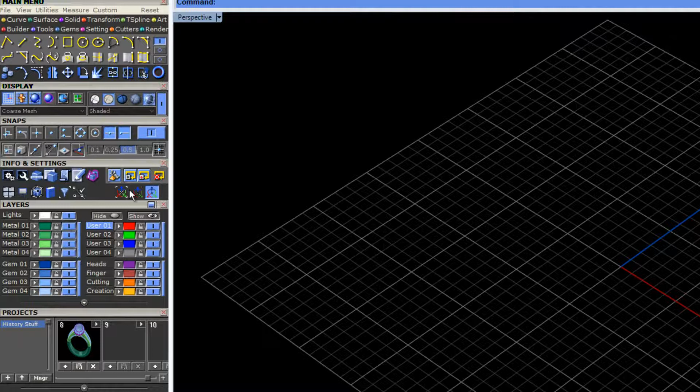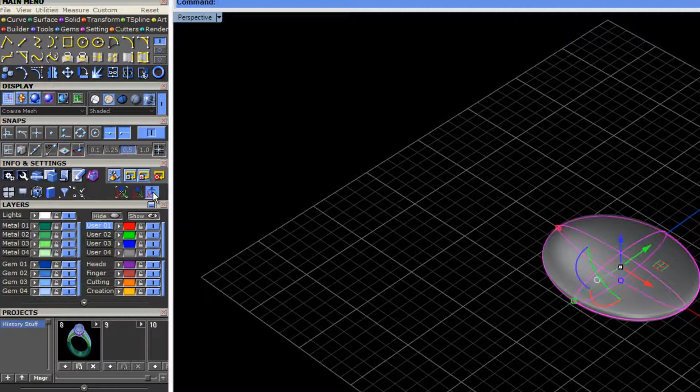So the first thing that you'll see here on the bottom layer is that we have three icons. And these are three icons for the Rhino Gumball. What is a gumball? Besides a delicious treat, well, a gumball is what Rhino refers to their interactive manipulation system here. You can see once I turn my gumball on by clicking on our icon, when I select an object, I am given a set of viewport control handles.

The way the gumball works is it puts all viewport control handles for move, scale, and rotate into one handy manipulator. So you'll see there are movement handles, which I can click and drag on. If anyone has used our MSR controls or the T-spline HUD manipulators, you'll be very familiar with what is happening here with the Rhino Gumball. Right, so you can see, it allows for movement.

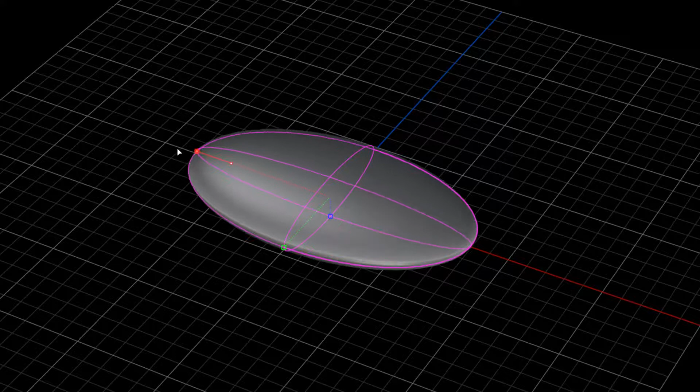We also have individual little spots right here for scale. As I click and drag on these, this would be a 1D scale. Okay, there'll be one running in the other direction, and then one vertically for scaling within the Z.

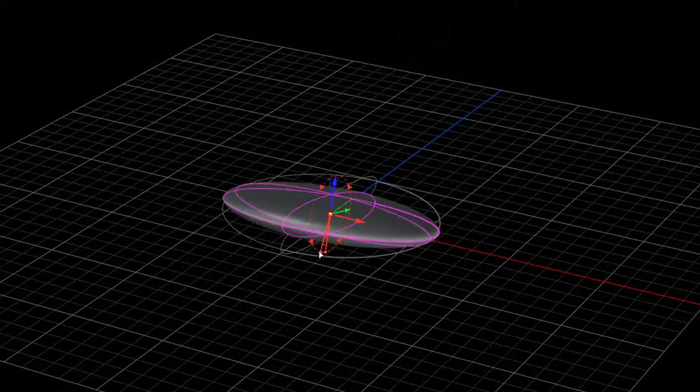Now, also, we have rotation handles, which you will see as these three little arcs right here on our gumball. So when I click and drag on these, you will see that it is rotating my object. Right? Same with this direction. And then we also have one for the other angle of rotation.

Now some of the other things that you will see here on your HUD. All of these rotation, movement, and scale manipulators are color coded. For example, you'll notice if I'm trying to move something in the Y direction, it shows up as a bright green, 1D scale in the Y direction is bright green, as well as rotation is bright green, all rotating or moving within our Y axis.

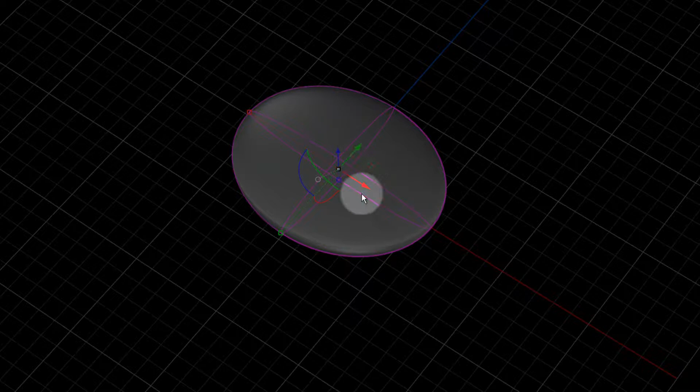Why I bring that up is you'll also notice here as I rotate my viewport around, you'll see this little box right here. And half of that box is bright green, the other half is red. What this little button is, if I click and drag on it, this is a 2D move. Again, if you've used the T-splines HUD, you notice they always have a little flat disc that you can use for a 2D move. So Rhino, with their gumball, has color coded it so you know exactly which two planes you are moving this in.

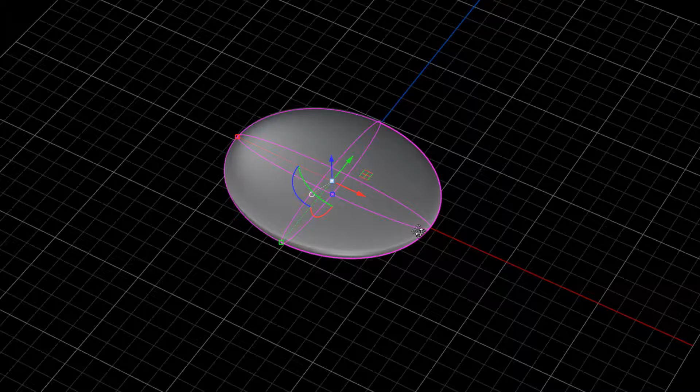So if I rotate around here, you'll see now one shows up that's blue and green. And if I keep rotating around, you'll see one that's blue and red. All right, Rhino 5 only displays the one depending on how you move it. Every now and then, if you move it just right, you can have two show up. But most of the time, you'll see just one of these 2D movement handles.

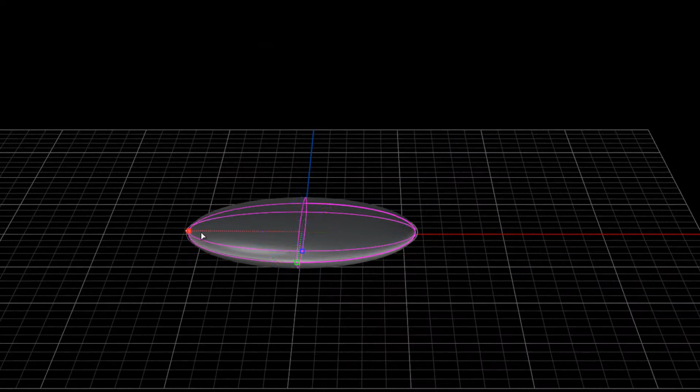All right, there are also some important keyboard shortcuts to know as we're using the Rhino 5 gumball. The first one is we showed you how I can scale with that particular handle. Okay, so that's just a 1D scale. If I click on this and hold down Shift, this will allow me to do a full 3D scale.

So you can see there it's only a 1D scale. If I click on this and hold down Shift, now it's a 3D scale. And if we're doing a 3D scale, it does not matter which one of these handles we select. Right.

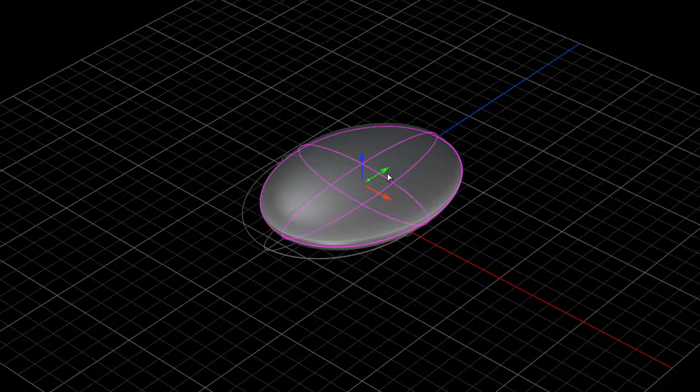One of the other things that has changed with Rhino 5 is that when we are moving an object, previously in Matrix and Rhino, if we held down the Alt key, we would make a copy of the object. However, in Rhino 5, they have changed this up ever so slightly. So with the new version of Matrix, instead of holding down Alt, you simply tap the Alt key once, and once you hit Alt, you'll notice there's that plus sign right there.

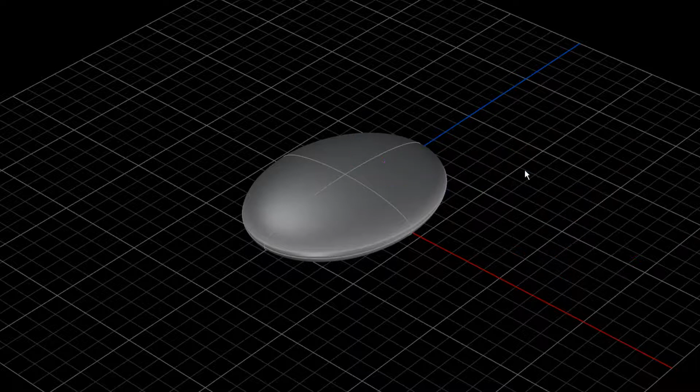Okay, so a simple tap of the Alt key versus a full holding down the Alt key is how you get your copied object. All right, so that is a slight difference in the new version of Matrix and Rhino than you will be used to. So that is an overall look at our gumball.

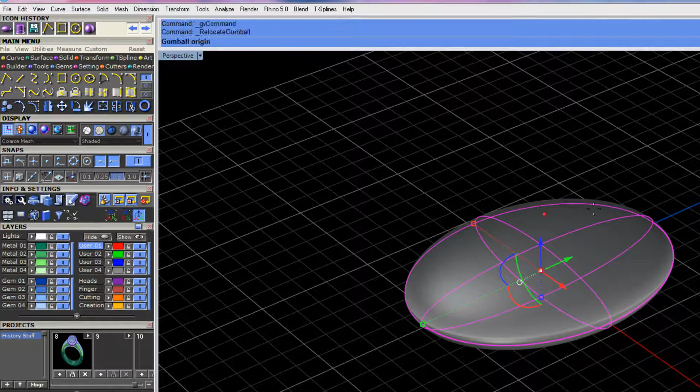Okay, as we continue on here into our info and settings, we have two additional icons. So the next icon here within our info and settings, they also have to do with the gumball. This one right here, if I click on it, will allow me to relocate the gumball. So it's going to ask for the new origin point. So I can snap right to an end.

And then in my command line here, it's going to ask me for the X direction. So I can hold down Shift. And then I can hold down Shift again to give it its Y orientation. So now I've set up my gumball to be right there on the end. Why would that particularly matter? Well, if I use scale now from this end, you can see this would scale differently because my point is right here in the center.

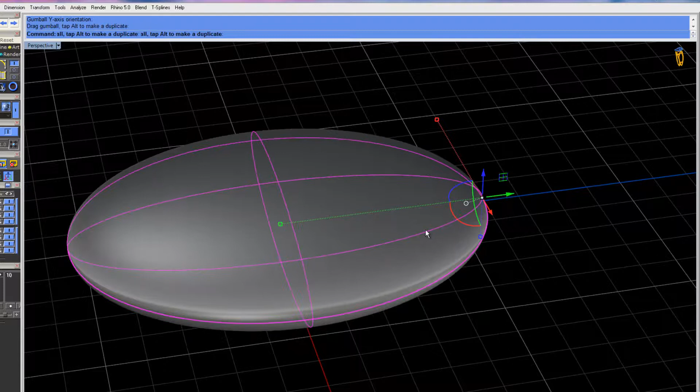All right. As we go back to reset this, there is a little icon right here in the center of our gumball. If I click on that, we will have a reset gumball button as well, and that'll take it back to its default position. All right.

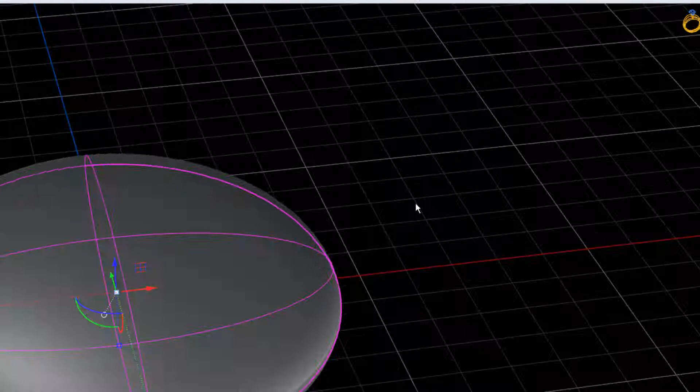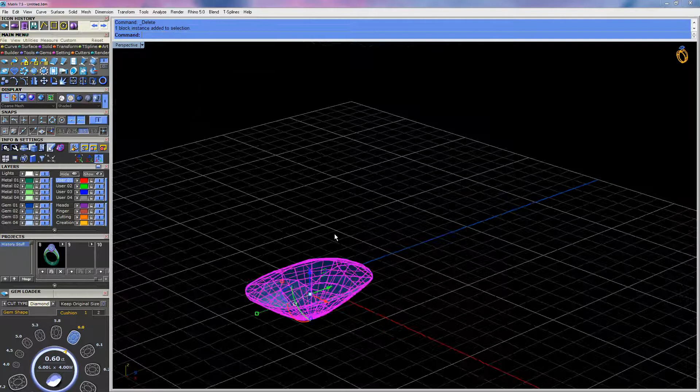A couple more notes about the overall use of the gumball. I've been working with a solid object right here. However, we can use this with curves, blocks, anything within the program can be used by the gumball. So you can see now if I select a block instance, for example, I have the gumball already on that as soon as I select my object.

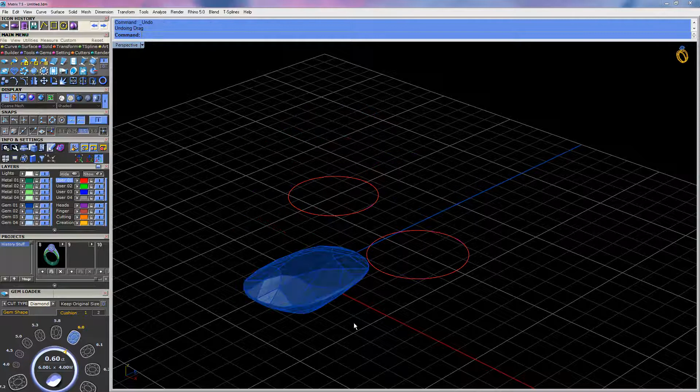In addition, I can select multiples of either the same object or different objects. Okay, if I select all of these together, the gumball will move all objects together as well. So that's a quick look at the gumball feature of Matrix 7.5.

Continuing on here with our info and settings, you'll notice another row of all new icons. So if I click on this icon right here, what this will do down at the bottom is it gives you a tabbed view of your viewports. So you could quickly cycle through the front, side view, looking down views by clicking on the tabs. Right? This makes it a little bit quicker as opposed to double clicking on a viewport to come out of the full size, double clicking to go back in. So this tab view allows you to quickly and easily move throughout them.

You also notice there's a plus sign that you can click on where you can adjust certain properties of your viewports. You can create a new floating viewport, for example, by simply clicking on this button, and you'll get a copy of the existing viewport that you're working on. Okay, there'll be a little X out there that you can click on to get rid of that.

So one of the other new viewport features within Matrix 7.5 is that if I click and drag on the perspective viewport, for example, and this is going to be hard to demonstrate on one single screen, but if I were to drag this off screen, or you can see I'm placing my cursor over my menus, as soon as I do that, it creates a copy of my existing perspective viewport. So I can move this over to my second monitor, for example, if I'm using a 2-monitor setup. All right, so we can X out of that.

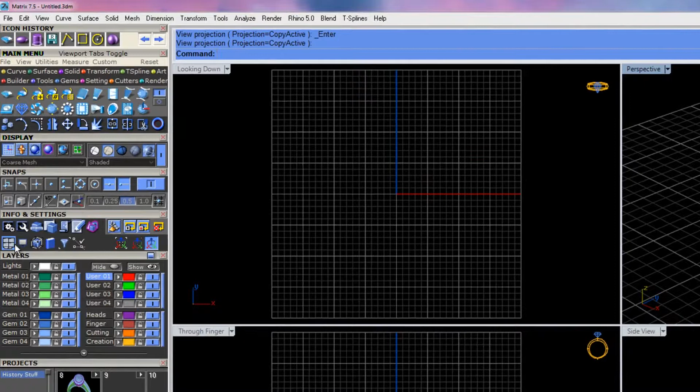All right, moving on through our info and settings tab. If I go back to the viewport tabs, I can click on that and that will toggle that option off. All right, next is our display menu. So if I bring an object out to display here, when I click on the display menu, we get this floating viewport, and this viewport can be docked along the side by moving your cursor. It can be docked or just left floating.

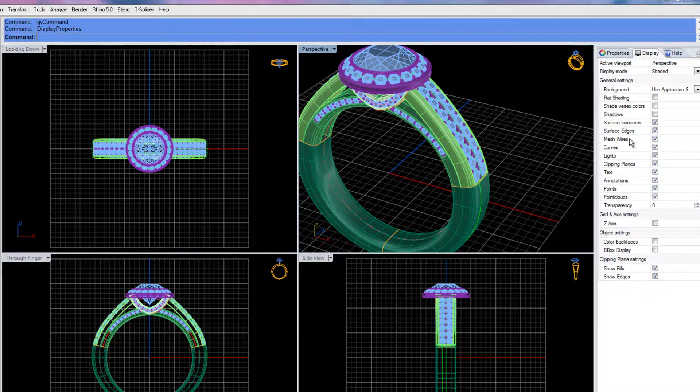So the display menu opens up a quick and editable properties tab for the display mode that I'm using. Currently I'm using the basic shaded mode, so you'll see that listed right here as well. I can go through here and choose what is shown or not shown in the particular shade mode that I'm working on, right?

For example, I could uncheck curves. I wouldn't see any of the curves out there on my ring right now. Also surface ISO curves, surface edges, and as I go through and do something like that, it starts to look more like a plastic shade mode. So you can quickly and easily do this with any existing shade mode that you are working on.

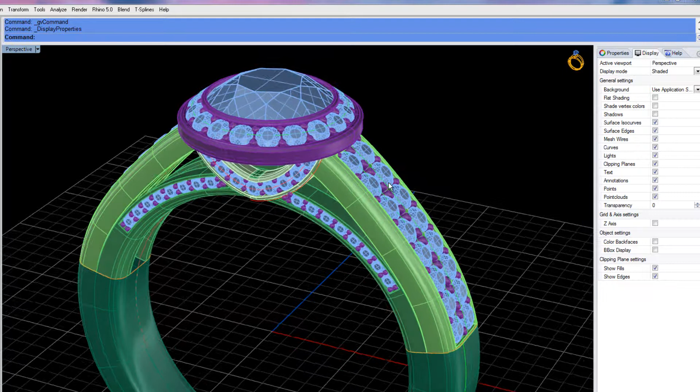Alright, so when I'm all done, if I want to close this out, you'll see this little wrench in the upper right hand corner that, if I click on it, there is the close button.

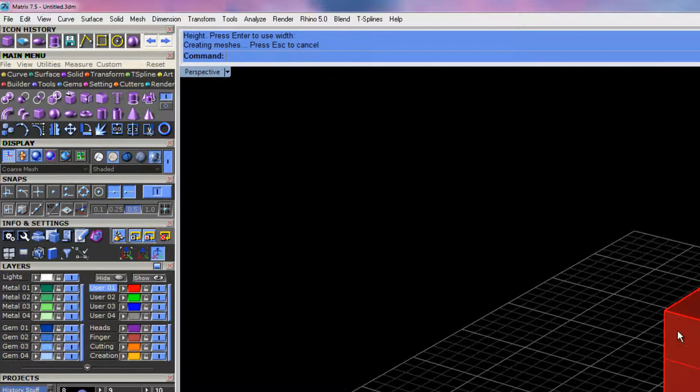Alright, so as we continue on our info and settings here, you will see we have a new tab called Box Edit. This is something new to Rhino 5 Matrix 7.5, and it can be done on any object. I am going to go ahead and create a box just to show you what this is capable of doing. So if I select this, and we'll go over here and turn on Box Edit, and again it's a floating menu that you can dock or have placed anywhere you want.

So when I created this box, I didn't really have any set dimensions in mind. But what this allows me to do is, you can see we have a size in the X, Y, and Z. So if I wanted this exactly 8 millimeters in my X, 8 millimeters in my Y, and in my Z I want it 5 millimeters, I can type those in and hit apply, and now my box, or whatever object I'm working on, has taken those exact dimensions, as well as scale.

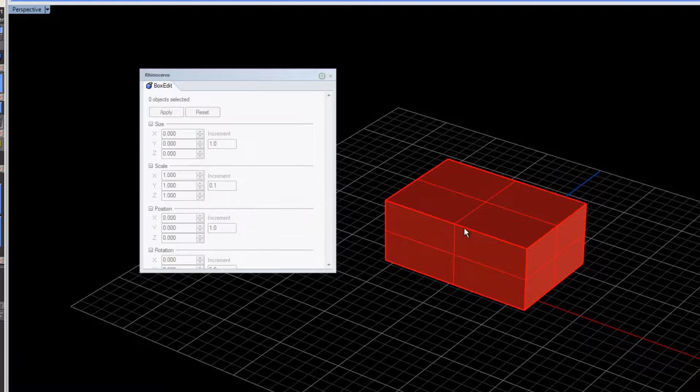For example, if I wanted to scale this in the X direction, I could type 1.5. Maybe I want to scale it up just a little bit, and I can hit apply, and it will scale that exact amount, which can be very handy as opposed to using Scale 1D or the new gumball. It allows you to do nice, easy, exact measurements by using Box Edit. Now, I did this with a box, but this can be done with any type of object.

For example, if I create a circle and I select it, you notice I still have my Box Edit window open, so it gives me the properties of this circle. So again, I could type in exact measurements. If I've calculated it out or I'm trying to match an exact size, I can type that in there, 9.75 for both the X and Y. Hit apply, and it will change that circle to that exact size.

So it allows for easy manipulation after you've created an object. Maybe you didn't make it the exact size you needed right off the bat. By using the Box Edit feature, you can quickly and easily manipulate existing objects. And again, we have an X button right here to close out.

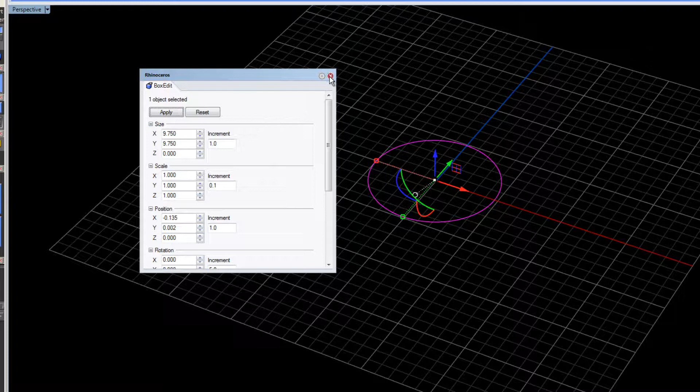Alright, our next icon as we continue on here is a library menu. As I open that up, you can see it comes out docked, but like anything else, we can move this around if I wanted to. This gives us a quick, almost Windows File Explorer-like view where I can find any folders that I want. You'll see there's a little drop down here.

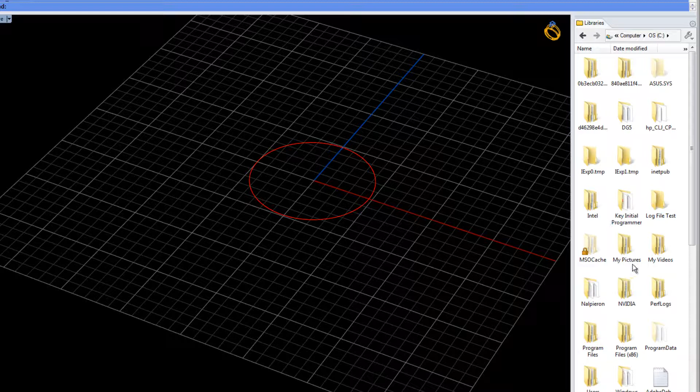So I can continue navigating through here and choosing the different folders that are on my computer, so I can easily and quickly drag and drop objects into my viewports as I'm using them. So it is just a little simple file explorer that you can use to drop in elements as you're working. Alright, so I can close that out again.

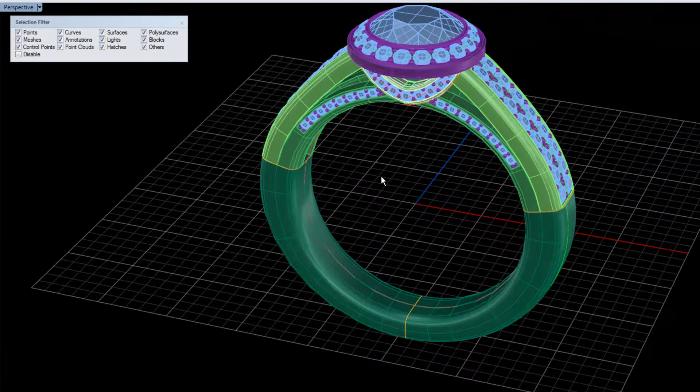Next we have what is called the selection filter menu. This is a very neat addition to the new version of Matrix and Rhino. So as I bring out an object, or a ring here for example, you'll notice there are all sorts of types of objects within the program that we can choose.

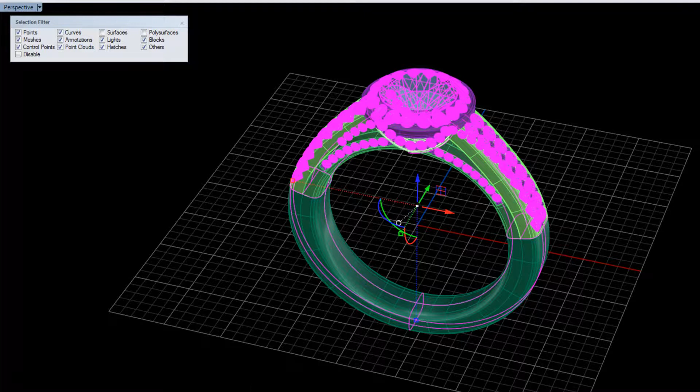So for example, if I were to uncheck surfaces and polysurfaces, as an easy example, when I drag my mouse around everything, I will select everything else, but because I have disabled surfaces and polysurfaces in my filter, when I draw my box around it, it will not select those objects. So if I did that, I could select this and hit delete, and I would be left then with just the polysurfaces on my ring.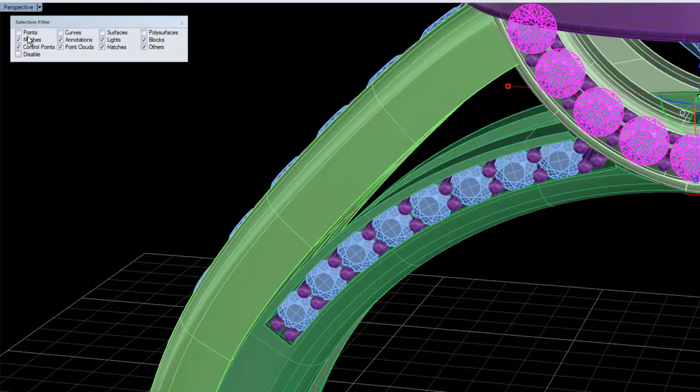Right? So you can go through and uncheck, and then when you do this, you won't be allowed to select certain objects within the program. So you can see I can't click on anything other than blocks or curves that I happen to have selected. Alright, so I can turn these all back on now, and Matrix will allow me to select everything.

Now the really handy way to use this as well is right now I have everything available to be selected. So when I draw a box, everything is picked. However, if I come up to blocks, for example, which block instances are gems within Matrix, if I were to right-click on this object, so I'm going to right-click to uncheck it, when you right-click on one of those checkboxes, it disables everything else but what you right-clicked on.

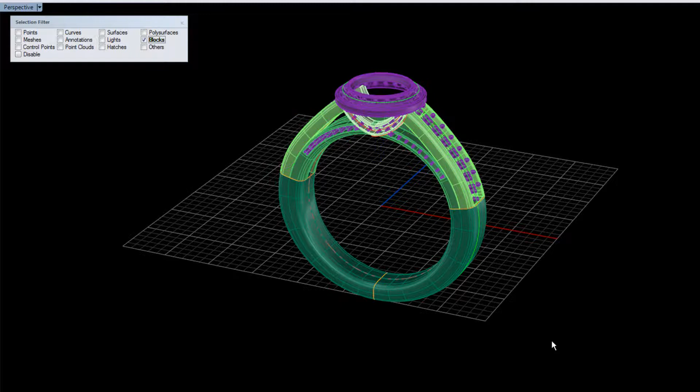So by right-clicking on blocks, it left only blocks checked, so I could drag a box around it, hit delete, now take this off to my mill, or whatever it is that I'm trying to do. Right? I could bring that back. And if I do this, again, if I have blocks as the only one selected, if I right-click on it, it will again now bring everything back.

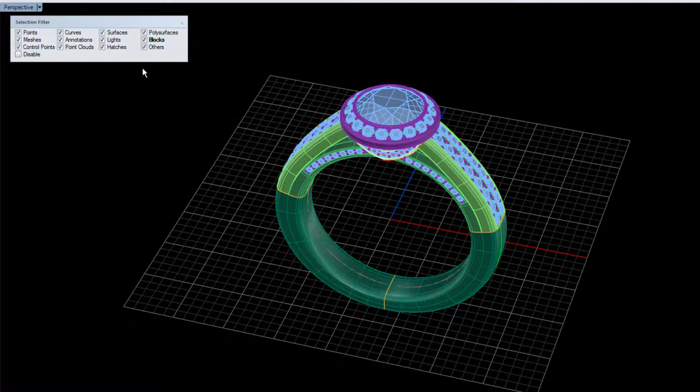So some nice things to do as you're modeling. Maybe all your curves are in your way. You're trying to see just what's left of your ring. You could right-click on curves, select all your curves, because that's the only object that's selected right now. So no matter what kind of box I draw, curves will be the only thing I can select, and I could hide those and continue working. Again, so to turn everything back on, you right-click, and that will turn all the objects back on.

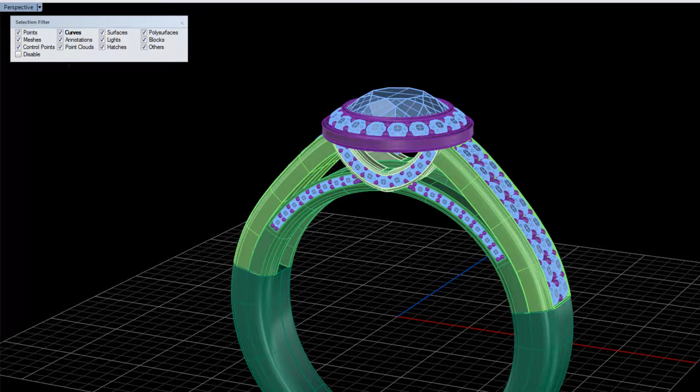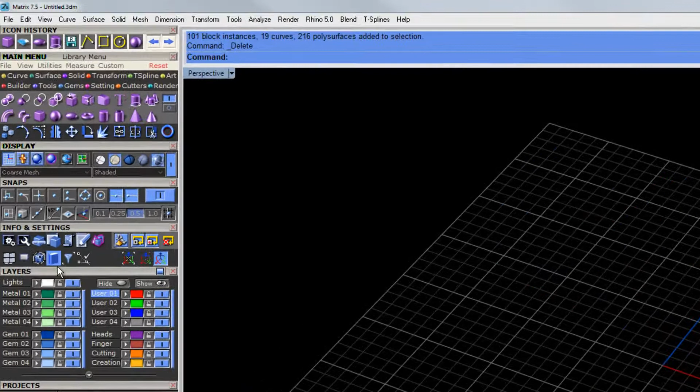Right? So the selection filter is a very handy and quick way to work through selecting things within Matrix. So again, I can X out of this to remove that selection filter as well. As we continue on here, that's the selection filter that we were just using. And then we have Smart Track.

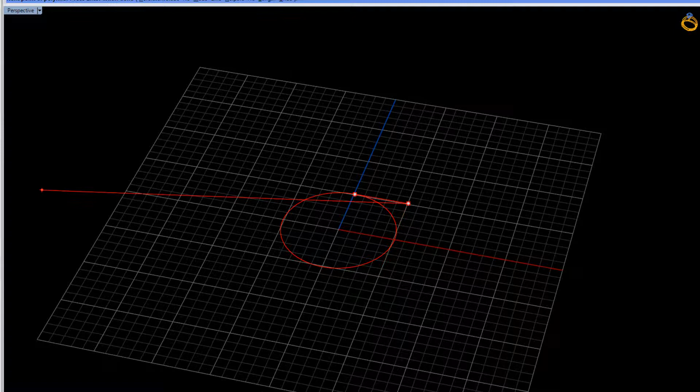So if anybody has ever used Smart Track in the past, we give you a simple toggle on and off for Smart Track. So if I start working here with Smart Track on, when I go to, for example, draw, you can see it's giving me my ortho lines. If I were to turn on some different O-snaps, now it will start to give me these different grid lines and Smart Track options available. All right, so this is just a simple toggle on and off for Smart Track now within Matrix.

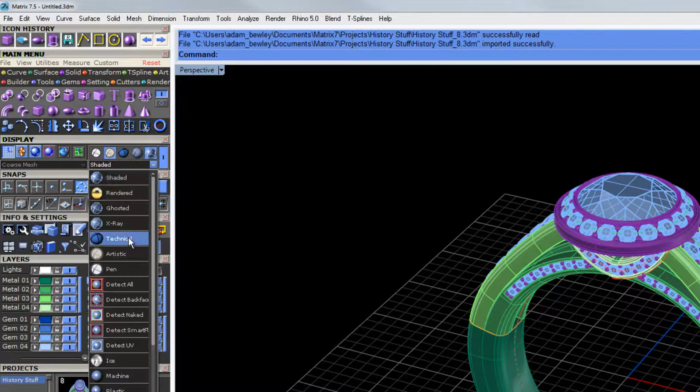All right, so that's a look at the Info and Settings tab. A few more other features that have been added into the new Matrix 7.5. Just to show you, there are a couple of new shade modes available. If I click on my drop down, you will see that there are some new ones called Technical, Artistic, and Pen. So if I choose Technical, it gives us a very kind of typical shaded, but with very heavy, thick drawn lines.

We also have one called Artistic. This will take a quick extra second to draw out there. So it's just another new shade mode. And this is a good example here that when I'm working with this, you can still see my curves. So if I wanted to, I could come over here to my display menu and say I want to turn off curves for this particular shade mode, so all I'm left with is that very hand-drawn look.

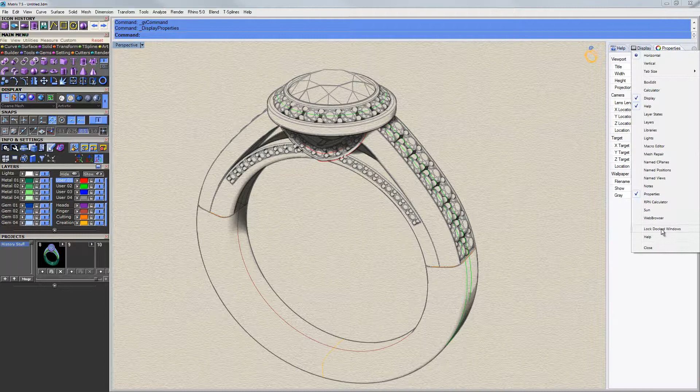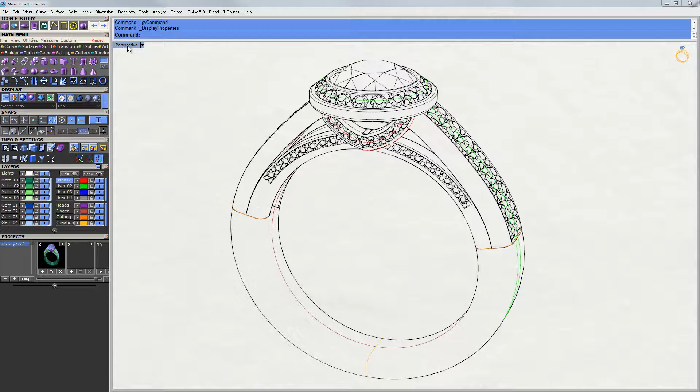Close this out, and then lastly we have one called Pen. It's very similar, but again shows curves that you could disable at any time within the display menu. Alright, so this has been a quick look at an overview of some of the new features display-wise that you will typically see within the new version of Matrix 7.5. You'll also find some new commands interspersed throughout the menus, but I wanted to give a general overview here of what you're seeing new and some of the new major additions to Matrix.